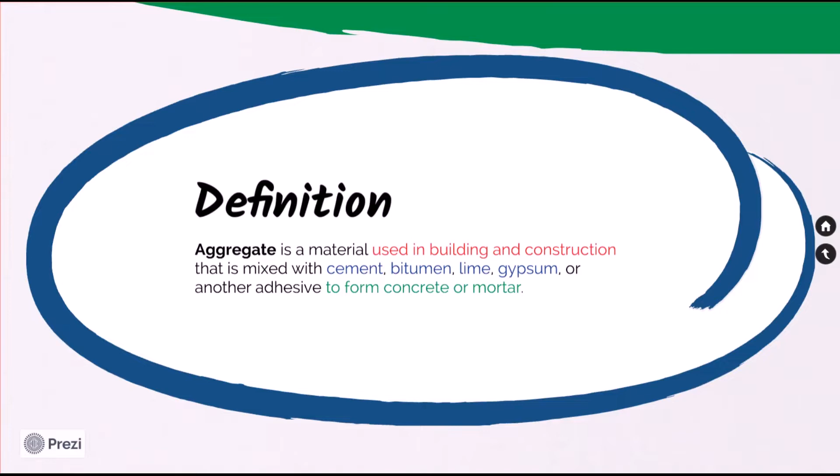What is aggregate? Aggregate is a material used in building and construction that is mixed with cement, bitumen, lime, gypsum, or another adhesive to form concrete or mortar. The aggregate provides the finished product with volume, stability, resistance to wear and erosion, and other desired physical properties.

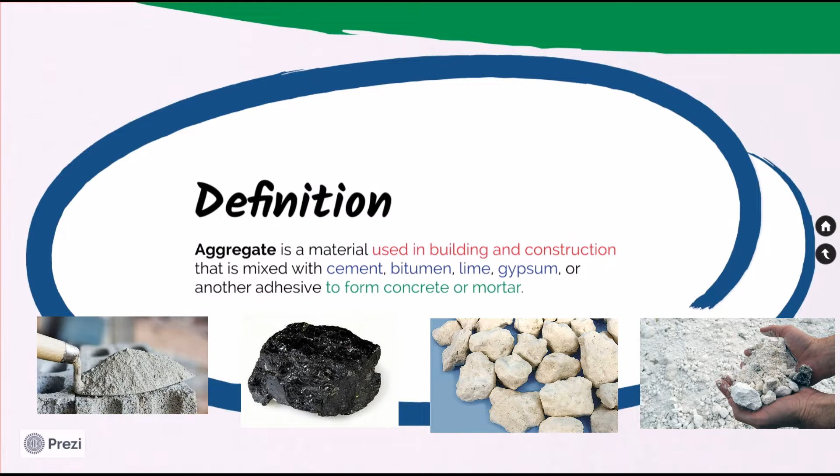Aggregates make up 60 to 80% of the concrete mix. They give concrete compressive strength and bulk. Furthermore, concrete mixes are chosen for their durability, strength, workability, and ability to accept finishes. Aggregates for a good concrete mix must be clean, hard, and strong particles free of absorbed chemicals or coatings of clay and other fine materials that could cause concrete deterioration.

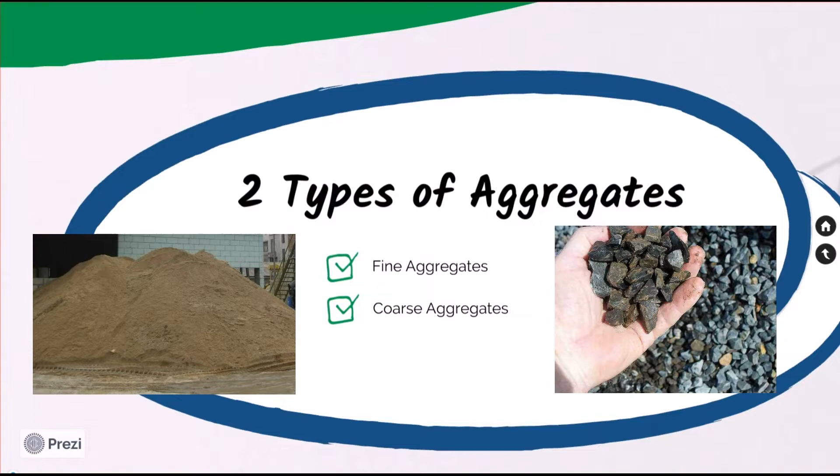Aggregates are divided into two types, either fine aggregates or coarse aggregates. Fine aggregates are used to create thin concrete slabs or other structural members with a smooth surface. Coarse aggregates, on the other hand, are used for more massive members. Now, let's proceed to properties of aggregates.

The first one is its composition. Aggregates containing materials that can react with alkalis in cement, causing excessive expansion, cracking, and deterioration of the concrete mix should never be used. As a result, aggregates must be tested to determine whether such constituents are present.

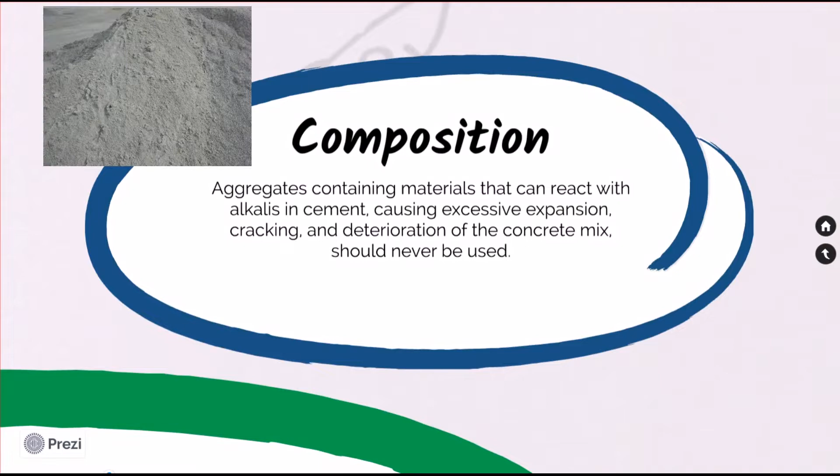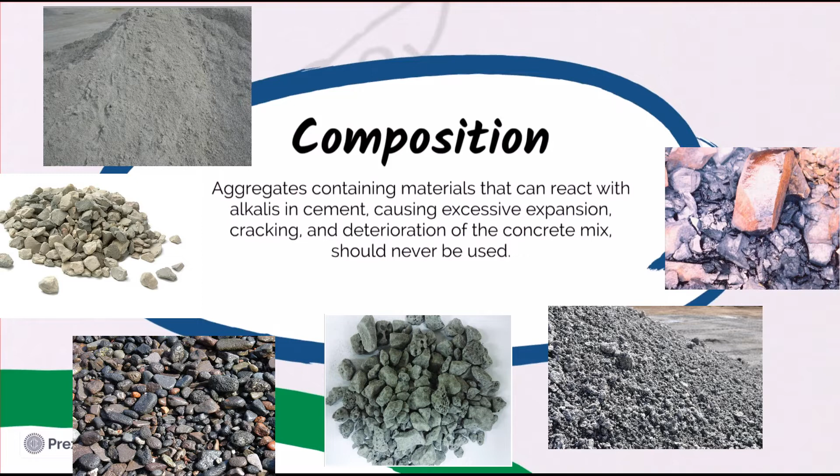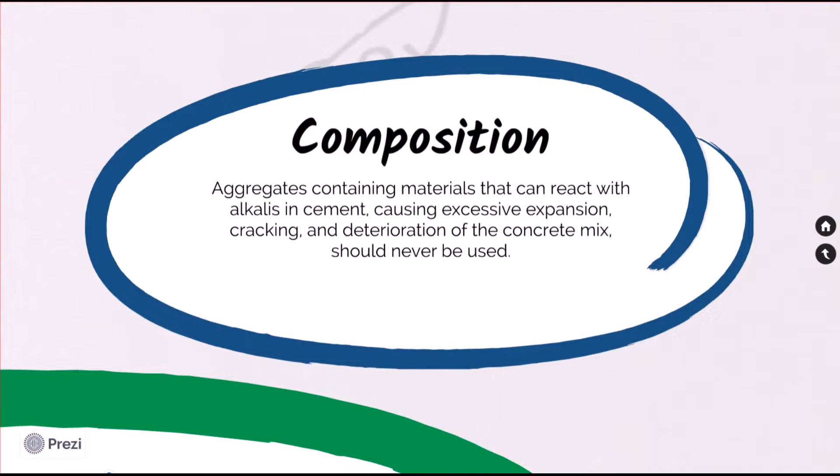Aggregates that are commonly used include sand, crushed or broken stone, gravel or pebbles, broken blast furnace slag, boiler ashes or clinkers, burned shale, and burned clay. Sand, crushed stone, or crushed slag screenings are the most common types of fine aggregates. Coarse aggregates, however, consist of gravel or pebbles, broken stone fragments, slag, and other coarse materials.

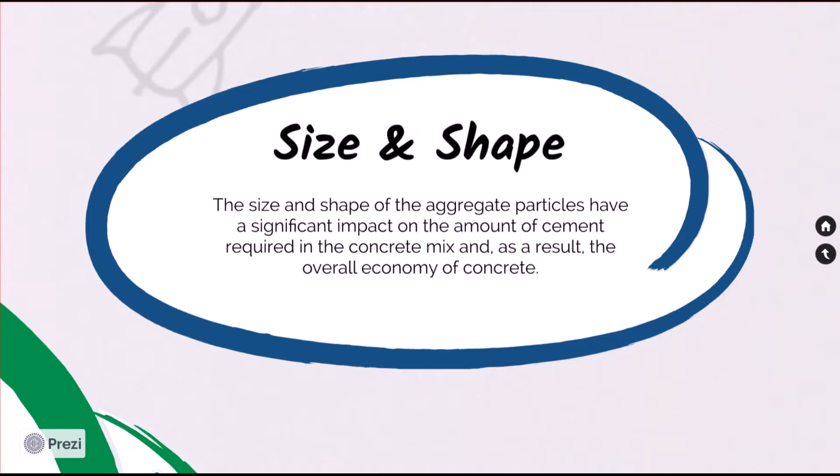Second, the size and shape of the aggregate particles have significant impact on the amount of cement required in a concrete mix, and as a result, the overall economy of concrete. Fine aggregates have a diameter of less than 9.55 mm, whereas coarse aggregates have a typical diameter between 9.55 mm and 37.5 mm. Third is its surface texture.

The development of hard bond strength between aggregate particles and cement paste is determined by the aggregate particle's surface texture, roughness, and porosity. Maximum bond strength develops when the surface is rough but porous. Aggregate surface texture can be smooth or rough. While a smooth surface improves workability, a rougher surface creates a stronger bond between the paste and the aggregate, resulting in greater strength.

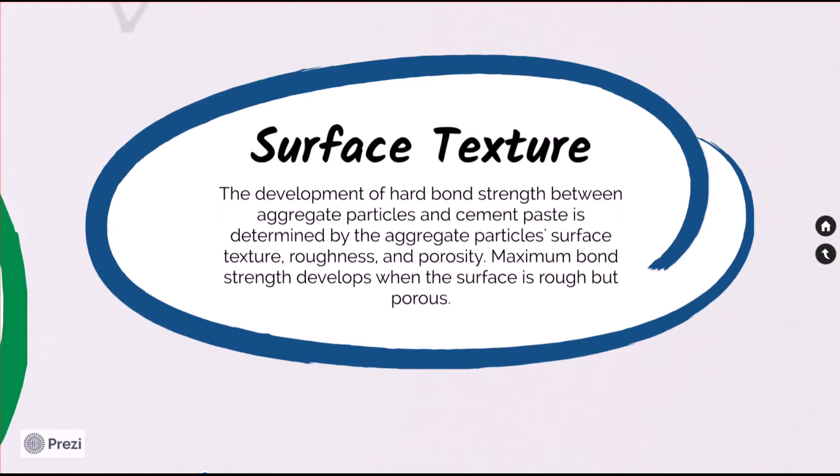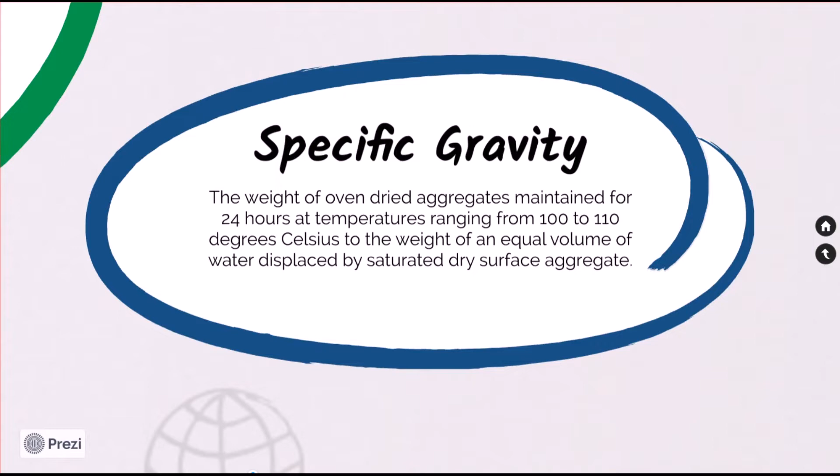Specific gravity is the ratio of the weight of oven-dried aggregates maintained for 24 hours at temperatures ranging from 100 to 110 degrees Celsius to the weight of an equal volume of water displaced by saturated surface dry aggregates.

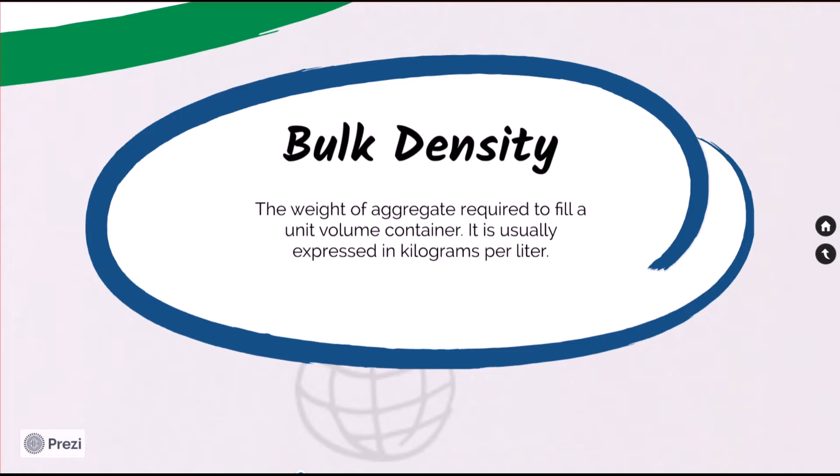Bulk density is defined as the weight of aggregate required to fill a unit volume container, or the mass of the aggregate per unit volume. It also determines the type of concrete for which it can be used to assess aggregate's quality. It is usually expressed in kilograms per liter.

The sixth one, voids, which are known as the gaps between the aggregate particles. The volume of voids is equal to the difference between the aggregate mass gross volume and the volume occupied by the particles alone.

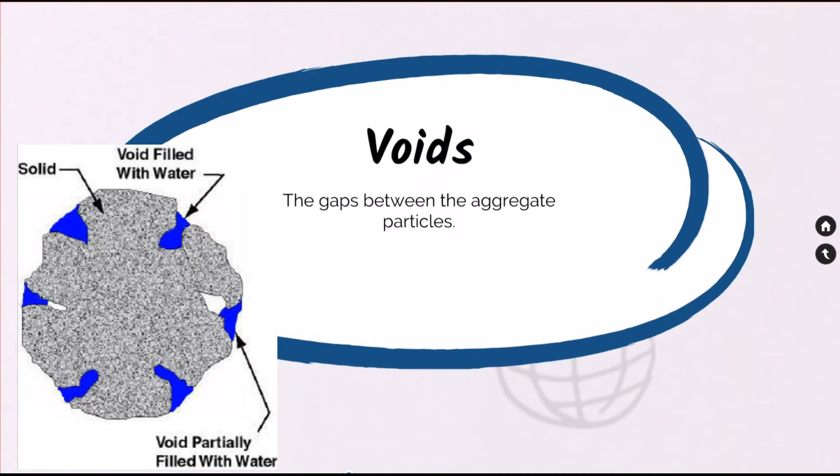Next is porosity and absorption. Pores are the minute holes formed in rocks by air bubbles during the solidification of molten magma. Porous rocks are those that have pores in them. Water absorption can be defined as the difference in weight between very dry aggregates and saturated aggregates under surface dry conditions.

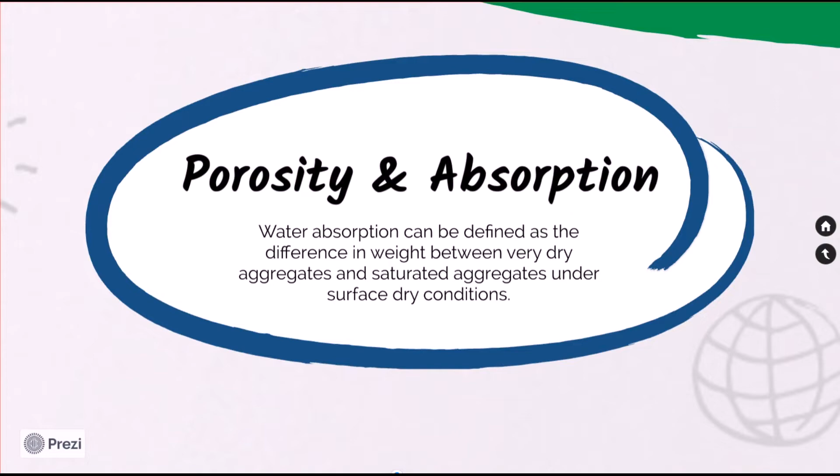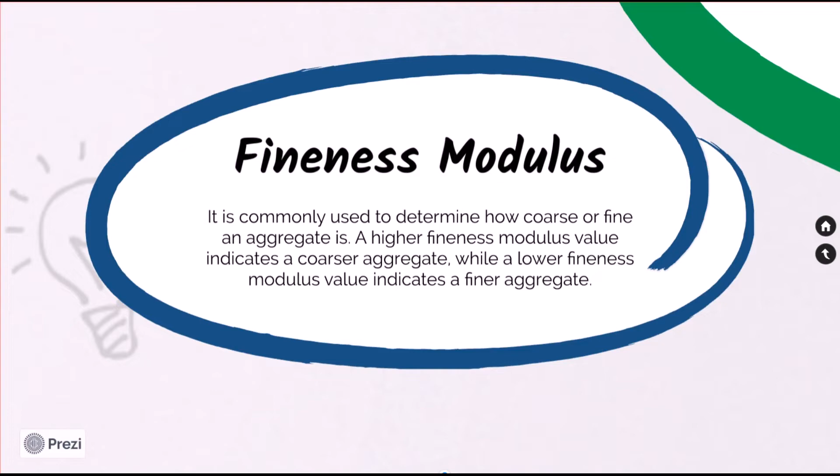The fineness modulus is commonly used to determine how coarse or fine an aggregate is. A higher fineness modulus value indicates a coarser aggregate, while a lower fineness modulus value indicates a finer aggregate. The ninth property in aggregates are deleterious materials, which are also known as prohibited materials. Aggregates should not contain any harmful materials in such quantities that they compromise the strength and durability of the concrete.

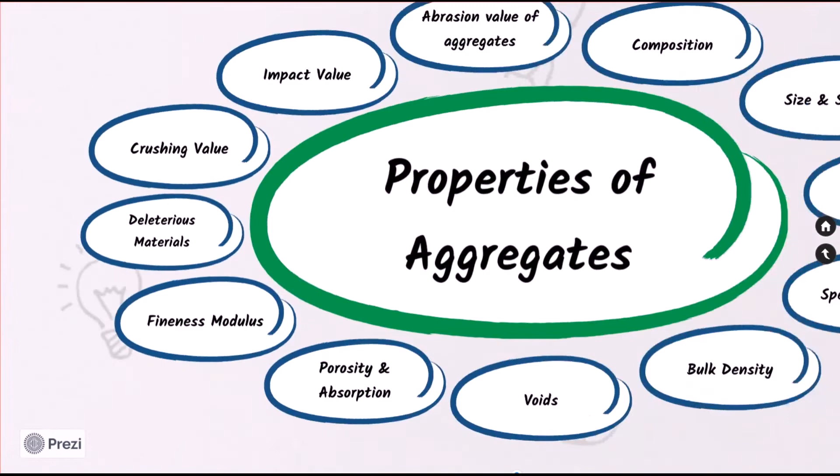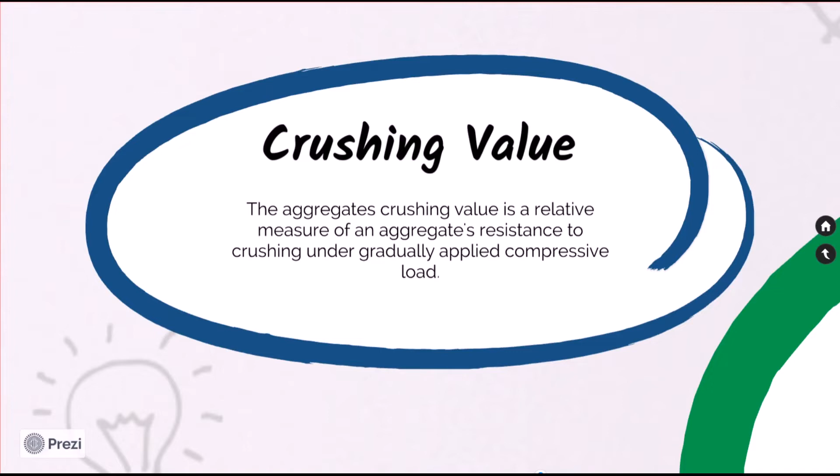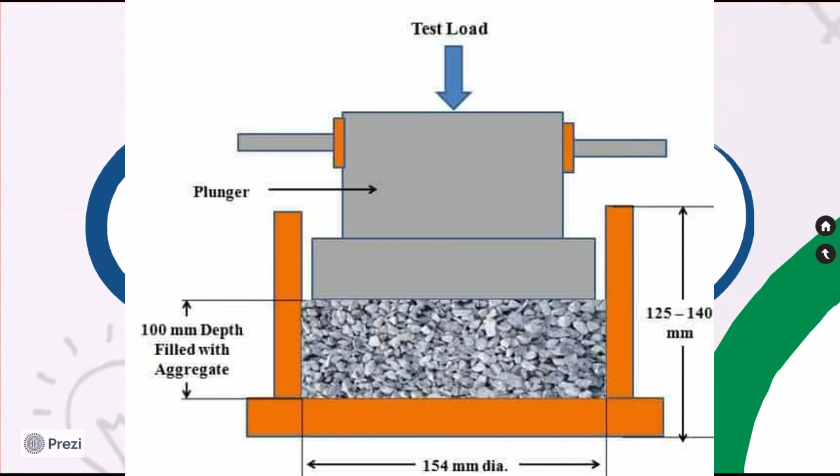Crushing value. The aggregate's crushing value is a relative measure of an aggregate's resistance to crushing under gradually applied compressive load. It is defined as the percentage by weight of crushed material obtained when test aggregates are subjected to a specified load under standardized conditions. The aggregate impact value gives a relative measure of the resistance of an aggregate to sudden shock or impact. Toughness is the ability of a material to withstand a sudden impact.

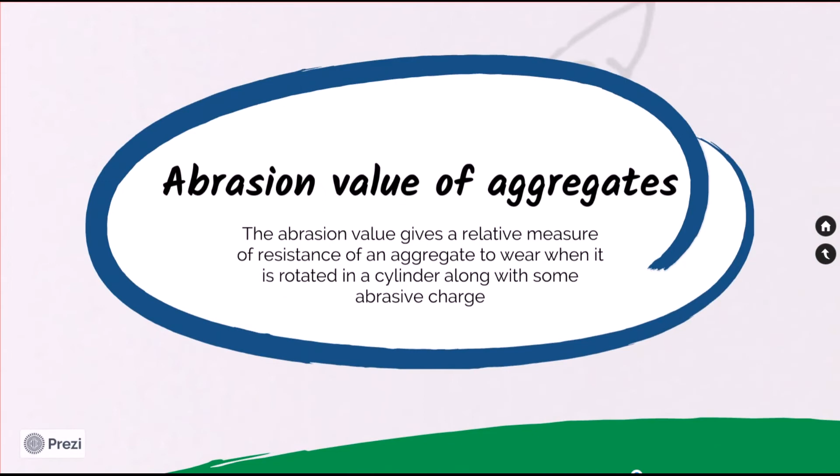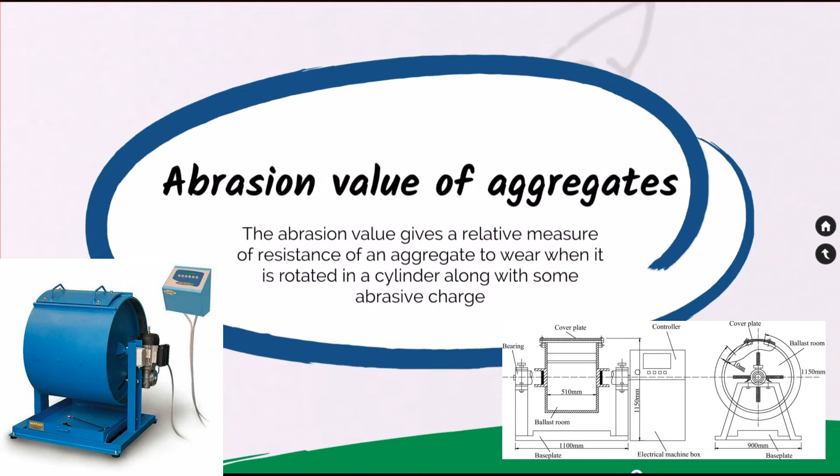Lastly, abrasion value of aggregates. The abrasion value gives a relative measure of resistance of an aggregate to wear when it is rotated in a cylinder along with some abrasive charge. In other words, it is the value that determines aggregate toughness and abrasion resistance. It includes aggregate properties such as crushing value, degradation, and disintegration.

ASTM was originally known as the American Section of the International Association for Testing and Materials when it was created in 1898 by Pennsylvania railroad engineers and scientists. Its goal was to address and prevent the industry's frequent rail breaks by developing standards that would ensure higher quality rail products. Today, it is known as ASTM International.

ASTM is still headquartered in Pennsylvania, but it also has offices in Belgium, Canada, China, and Mexico, as well as one in Washington, D.C. ASTM has come a long way since creating steel standards for the railroad industry. Today, ASTM develops and publishes technical standards for a variety of industries with the goal of improving performance and safety across a wide range of products, materials, systems, and services.

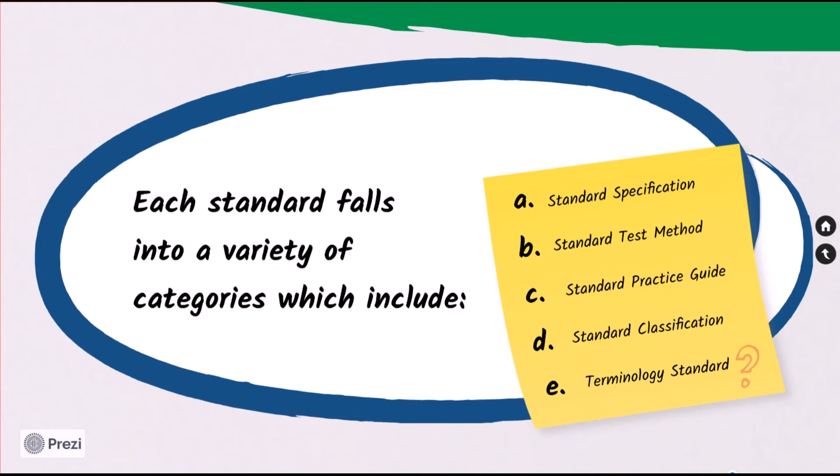Thousands of ASTM standards are followed all over the world, each with its own unique number. Each standard falls into a variety of categories which include standard specification, standard test method, standard practice guide, standard classification, and terminology standard. This is a list of ASTM International standard designations. Standard designations typically include a letter prefix followed by a sequentially assigned number. This can be followed by a dash and the last two digits of the year the standard was implemented.

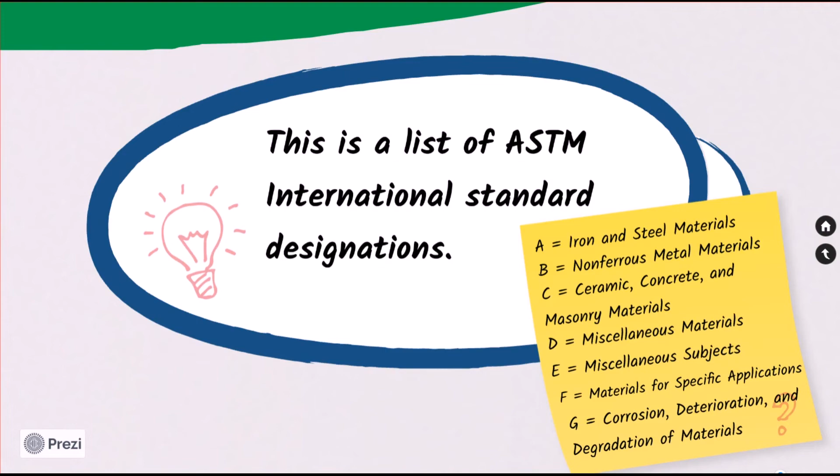The following subjects are represented by prefix letters: A for iron and steel materials, B for non-ferrous metal materials, C for ceramic, concrete, and masonry materials, D for miscellaneous materials, E for miscellaneous subjects, F for materials for specific applications, G for corrosion, deterioration, and degradation of materials.

What is AASHTO? The American Association of State Highway and Transportation Officials is a nonpartisan, nonprofit organization that represents highway and transportation departments from all 50 states, the District of Columbia, and Puerto Rico. It includes all modes of transportation such as air, highways, public transportation, active transportation, rail, and water.

Its primary goals are to promote the development, operation, and maintenance of a national transportation system that is integrated, to educate the public and key decision makers about the critical role transportation plays in ensuring our nation's good quality of life and sound economy, and to act as a liaison between state transportation departments and the federal government.